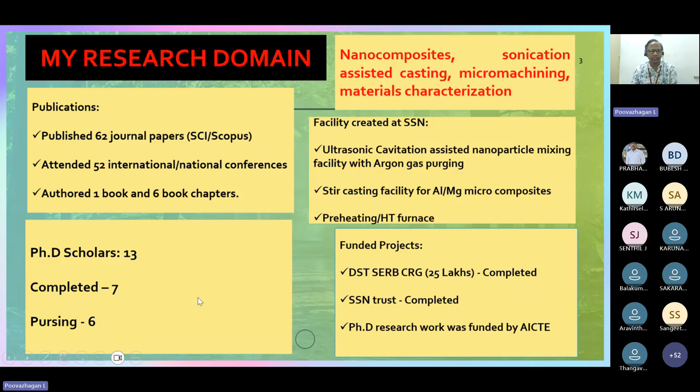This is about SSN, one of the very good green campuses in India. We are the only self-financing affiliated college in the NIRF ranking less than 50. This is about my credentials. As of now, I have guided 7 scholars and 6 scholars are currently pursuing PhD.

So at the end of this lecture, we will try to understand what are all the selection criteria we are going to use to select the lightweight material for additive manufacturing processing. So my focus will be mainly on the lightweight structural material, what are all the selection criteria, and what are all the widely acceptable additive manufacturing technologies that can be used for lightweight structural material manufacturing, layer by layer.

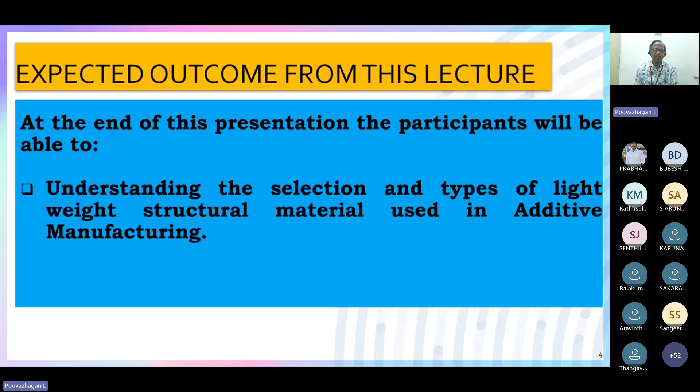This is the content in which I am going to present. The first one is the introduction of lightweight structural material, what are we doing with the material, and what are all the methods available for selecting lightweight structural material, and what is the role of additive manufacturing in the fabrication of lightweight structural material.

And what are all the most important additive manufacturing technologies we can use for manufacturing lightweight structures, so that we can able to decide which particular additive manufacturing technology shall be used to manufacture any one particular lightweight structural material.

Also, at the end, we will have some quiz session so that we can have some recap.

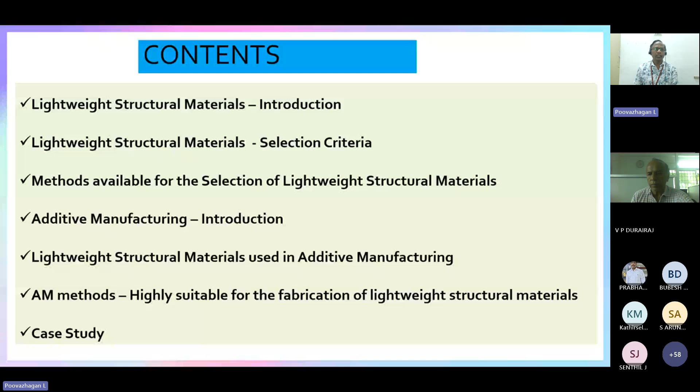These materials are widely used in structures. The well-known structural application is, for example, commercial buildings or residential buildings or educational buildings, where we are using RCC, reinforced cement concrete, as a structural material. So widely we are using it in applications of beams, columns, and also in automobile chassis we are using, for example, aluminum panels, also bicycle frame. All these are some examples of structural material.

So I am not in this case talking about... these are some of the materials that can be used in structural applications.

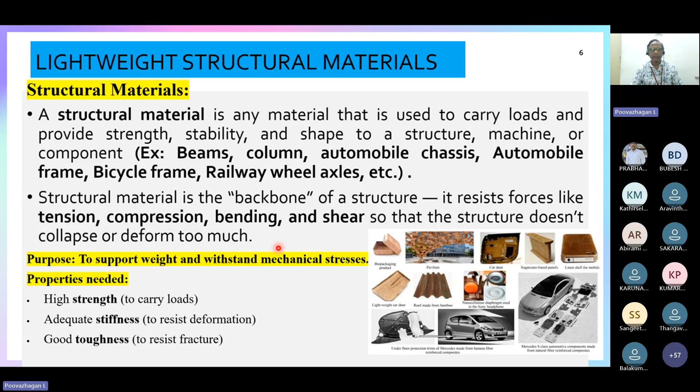So the ultimate aim of any structural material is to withstand the tensile, compressive, shear, and bending type of loads. Whenever we are looking at lightweight material, that type of material naturally will be having density lesser than 5 grams per centimeter cube.

So the property we look for in the structural material is specific strength and specific stiffness. That is, for the given weight, how much load the material can withstand - that is known as specific strength. Similarly, for the given weight, how much stiffness the material has - that is known as specific stiffness.

So whenever any material has high specific strength and high specific stiffness, that material is known as lightweight structural material. These materials are generally used to withstand all types of loads - not only tensile, compressive, shear or bending, but in real time any type of loading condition, suddenly applied impact load, any type of loading condition. So naturally this lightweight structural material tends to have resistance against these.

So whenever we use lightweight material in any application, ultimately we are going to reduce the weight of the system. Whenever the weight of, for example, an aircraft reduces, we save a huge amount of cost in fuel consumption. Similarly, the energy savings are also huge. Ultimately we are moving towards sustainability, which is the core principle nowadays all developed countries are moving towards.

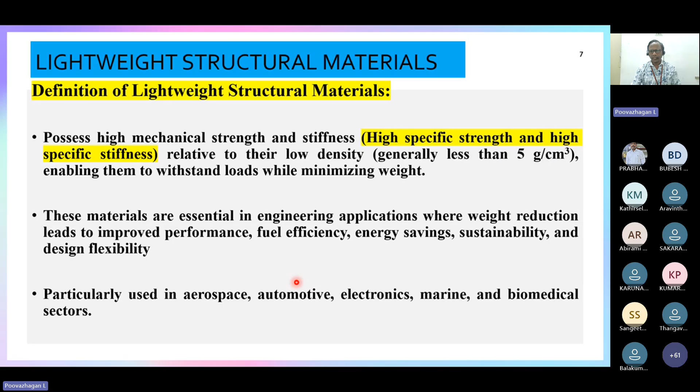So whenever we talk about sustainability, it leads to a simple lifestyle of saving energy or reducing the carbon footprint. So all structural materials in the lightweight category are widely recommended in aerospace application, automotive, electronics, marine, and even in medical applications, but most applications are in aerospace and automotive. In aerospace you can find titanium, aluminum, magnesium. Nowadays n number of composite materials are used in the lightweight category, and similarly in automobiles also we find n number of lightweight structural materials.

This slide gives an idea about widely acceptable structural materials. Steel is widely used as a structural material, but the problem with steel is its density, which is huge, around 8 grams per centimeter cube. However, its toughness is very good. Out of the available materials in this category, steel has the highest possible toughness.

Coming to aluminum alloy, it is an alternative to steel in most aircraft and automobile industries. Its density is around 3 grams per centimeter cube, so almost one-third of the weight is saved when using aluminum as a replacement for steel. But the fracture toughness value, maximum around 35, is also about one-fourth of steel.

So we need to compromise, and also consider the cost factor. If we take steel, the cost is somehow less, but when considering aluminum, titanium, or magnesium alloy, the cost is huge. Correspondingly, we save weight, and when we save weight, fuel consumption is less. When fuel consumption is less, the carbon footprint is also less. In the end, we move towards sustainability, which is the core principle of lightweight material.

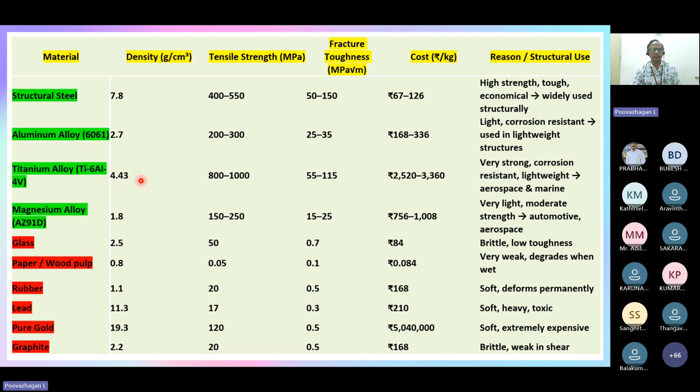So if you are considering lightweight structural materials, aluminum alloys and titanium alloys are widely acceptable in the metal or alloy category. If you are considering composite material, then carbon fiber reinforced composite or glass fiber reinforced composite are widely acceptable lightweight structural materials.

Next to composite, you can find aluminum around 20%, and titanium and its alloy around 15%. Then steel - we are still using steel at 10%. Other materials like magnesium are around 5%.

The major issue whenever we go to steel is, for example, each 1 weight percentage reduction in aircraft weight leads to almost 0.75% decrease in fuel consumption. So if you reduce the weight of the aircraft by 14.5 kg in a net, that leads to around US dollar 1.2 million in annual fuel savings.

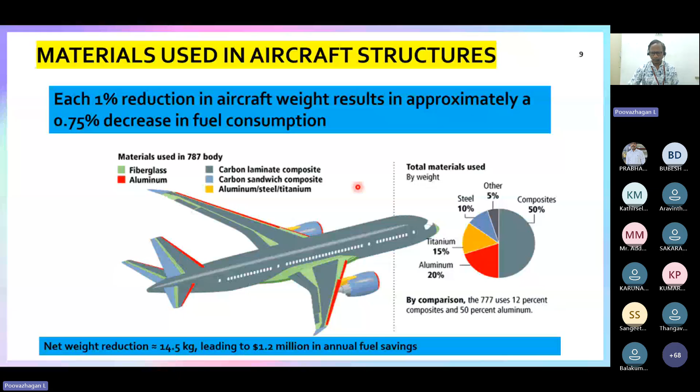So if you want sustainability, one way is to move towards lightweight material. This FDP is more relative to lightweight structural material that can be used in additive manufacturing applications. These are some examples of structural material in which naturally we use steel or cast iron.

Whenever we replace steel or cast iron with a lightweight material category like aluminum, you can save a huge amount of weight, and naturally a huge amount of cost cutting in fuel consumption. For example, the engine block naturally used steel, but nowadays it has been replaced with aluminum alloy.

Similarly, in the automobile wheel - this case study I will discuss in depth at the end of this lecture - we also use steel, but it is heavier. The only advantage is it is cheaper compared to aluminum or magnesium alloys.

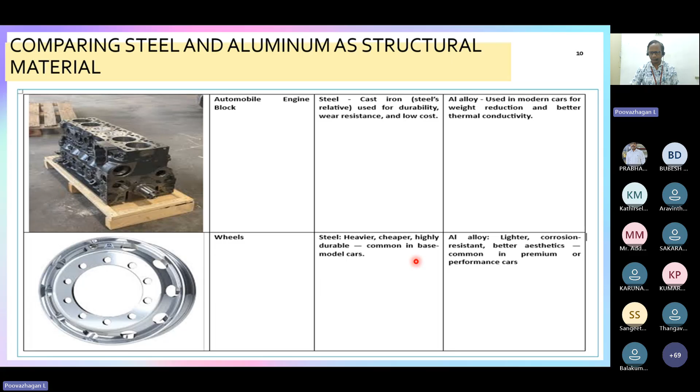Similarly, for the automobile body chassis and body panels, previously and even nowadays we use steel, but this steel is now being replaced with aluminum alloys. So several aluminum alloys are now available to replace steel.

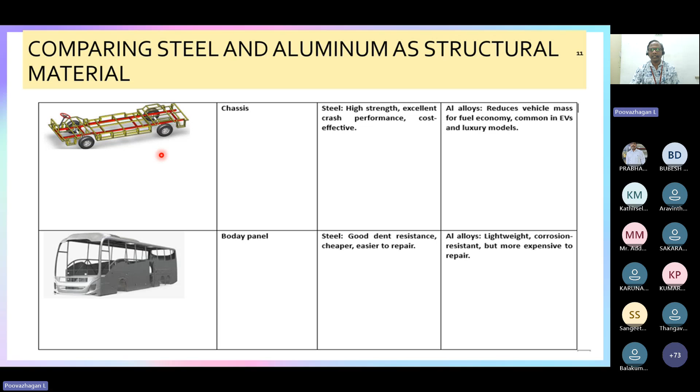The widely acceptable aluminum alloys are 6061, 6063, 5083, 5089, 5053, then 7075. All these aluminum alloys are slowly replacing steel in the automobile or aircraft industry. The ultimate aim is to replace the denser material with lightweight material.

Coming to the selection criteria, whenever we talk about lightweight structural material, we need to consider important properties. If we consider mechanical properties, the foremost is toughness. Remember this term - toughness plays the major role in selecting any material for any engineering application. When I say a material has good toughness, that indicates it has very good strength, and at the same time good ductility.

That is, if you take the stress strain diagram, it has very good x-axis, that is ductility, and also very good y-axis, that is strength. So the material which has good strength and ductility is naturally going to have very good toughness property.

Then stiffness, that is resistance against deformation. Any material which has good elongation and good Young's modulus will have good stiffness. Actually, stiffness is measured by measuring the Young's modulus of the material.

Then fatigue strength - fatigue strength relates to repeated type of loading. Whenever any material is subjected to repeated loading, that material will be experiencing fatigue. So all these mechanical properties are very much important whenever you are selecting the lightweight material for structural application.

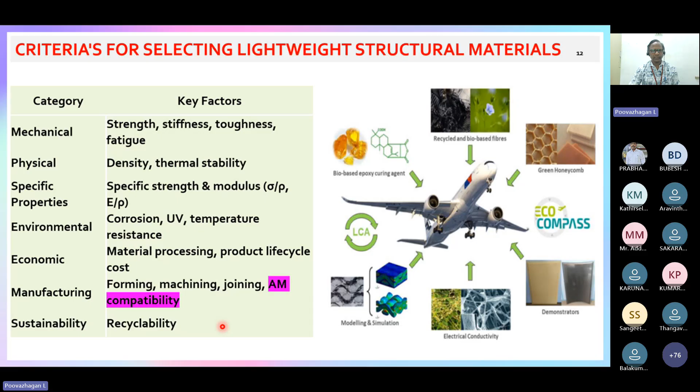So whenever we talk about sustainability, whatever material we choose in the lightweight category should be recyclable. Whenever it is not recyclable, that is not a sustainable material - that is the ultimate aim of sustainability.

So what are the methods available to select the lightweight material? The well-known method is the Ashby chart. You might be very much familiar with this - you have a ready-made chart.

This particular chart gives the idea of the relation between two important properties, like strength and density (that is weight), stiffness (that is Young's modulus) and density, then stiffness and cost. By using the Ashby chart, you can select the material with respect to specific strength and specific stiffness.

Another well-known method is WPI method, weighted property index. For these two methods, I will give the demonstration how these two methods can be used to select the lightweight material for structural applications. Apart from these two well-known methods, nowadays ready-made softwares are available.

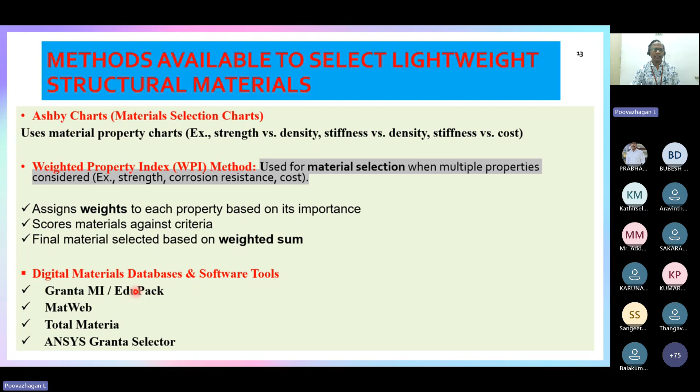We can directly use this online software to select the material for the lightweight application. Also, the well-known multi-criteria decision-making methods can also be used to select the material for lightweight structural application, like TOPSIS or fuzzy Promethee, even desirability analysis. All these methods can be used to select the particular material for structural application.

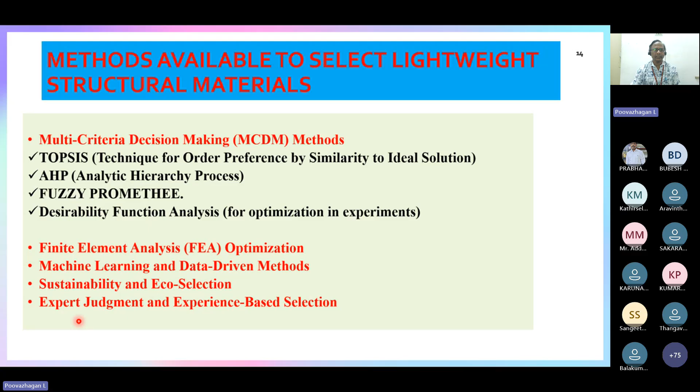Apart from this, we can also use now machine learning technology, also the expert judgment. Anyone who is having very good knowledge in the material selection, you can give the particular material for the selection of lightweight structural. So coming to the material selection category, the well-known chart is known as Ashby chart.

Then ceramics also having very good low density, but the tensile strength of the ceramics is also not as much as comparable to the metal or alloy. Then coming to the metal or alloy, widely acceptable structural material in automobile, aircraft, marine and electronics industry. So most of the structural materials are metal or alloy based, like steel, aluminum alloys, titanium alloys and magnesium alloys.

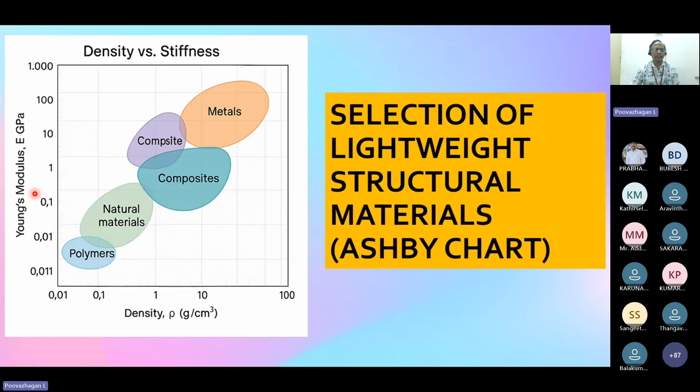You can select the density of the material and the toughness you require, or the stiffness or strength you require. For example, if you want 2.5 or 3 grams per centimeter cube with around 100 megapascal strength, accordingly you have to select the material in this category. Mostly that will be magnesium or aluminum based alloys.

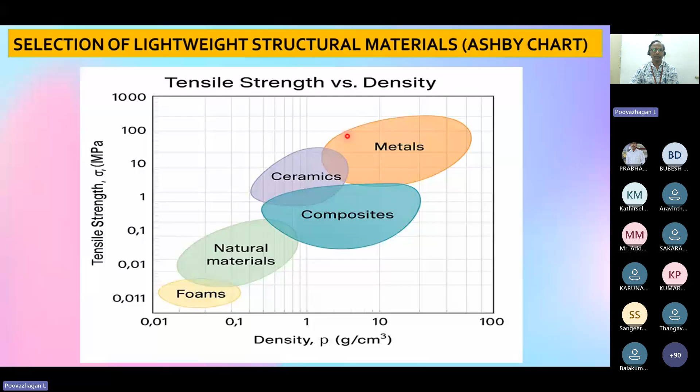So this Ashby chart will give a direct idea to select the material based on the weight or density relation with the various properties of the material, like tensile strength or Young's modulus, that is stiffness.

Method to select the material for lightweight application: WPI. This is a very interesting method where if you are going to have n number of properties, for example corrosion resistance, cost, fatigue strength, creep resistance, or wear resistance, then you can use this WPI method where you need to list them.

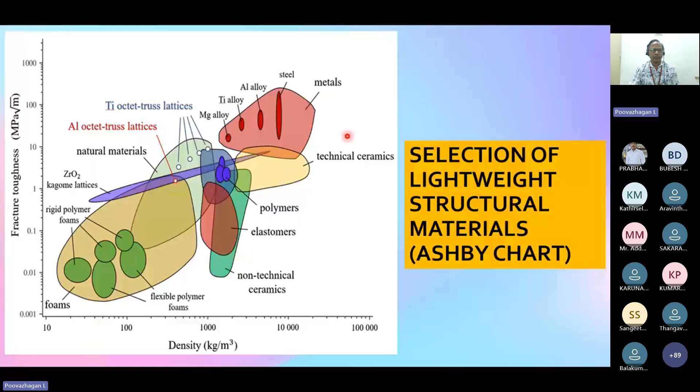For example, I have chosen lightweight automobile wheels. Generally steel is widely used in automobile wheels, but nowadays we talk about alloy wheels. In the alloy wheel category, generally aluminum alloys are used. Still, if you want to reduce weight, you can use magnesium alloys. Naturally, whenever we replace steel with aluminum, cost will increase. If we replace aluminum with magnesium, again cost will increase. But we can save weight.

Whenever we are able to save weight, we can save fuel consumption cost, so we can move towards a sustainable lifestyle. That is the ultimate aim of any lightweight material application. This WPI method is widely used whenever we have multiple properties to consider.

So whichever property is most significant for that particular application, we need to assign the weight. For automobile wheels, for example, if tensile strength is most significant, you assign more weight to it, then density, then corrosion resistance, then wear resistance, then cost. Like this, we give weightage to each property for the particular application. For example, 5 is extremely significant, 3 is moderately important, and 1 is less important.

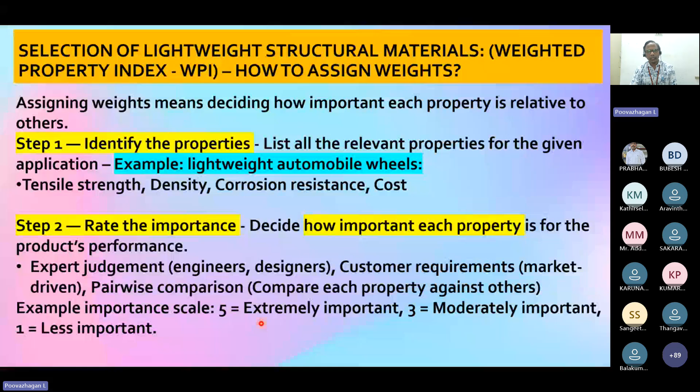All these weightages are for the material and its properties. For example, if you are choosing aluminum alloy for the automobile wheel, the most important property should be tensile strength, fatigue strength, or corrosion resistance. So we need to assign weight to that. Depending on this weightage, we need to give the rating.

For the automobile wheel, tensile strength is most important, so we give 5 to this weightage. Then density is next most important because we are considering the specific strength of the material, so density is also very important—we need a material with less density. For that we assign a weight of 4.

Corrosion resistance: naturally the automobile wheel, whenever it is moving over road conditions, is subjected to a huge amount of wear and tear. Estimating cost for any manufacturing industry is an economical action—we need to reduce the cost of manufacturing. So for cost we give a weightage of 1.

We are considering only these four properties. I have not taken fatigue here. Fatigue is also very important for the automobile wheel, as the wheel is continuously rotating and subjected to repeated cyclic loading, but that property I have not considered here. We are considering only these four properties.

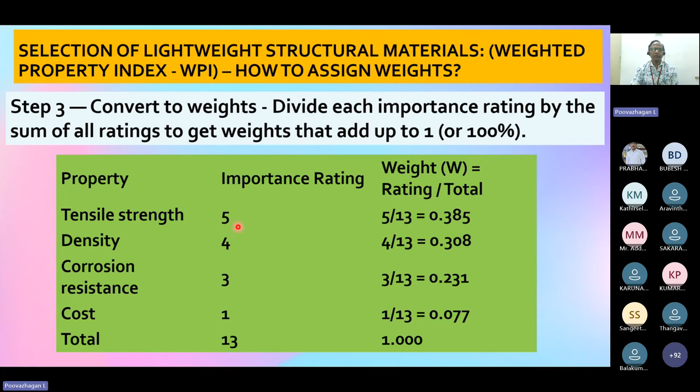The total rating is around 13. So we need to get the importance percentage for each property. For example, tensile strength 5 divided by 13 is around 38.5 percent. Density 4 divided by 13 is around 30.8 percent. Adding all these percentages leads to 100. So by using this WPI method, we can find that tensile strength is the most important property for automobile wheel applications, and next to tensile strength, density plays the major role.

So when considering the various methods available for selecting lightweight structural application material, the Ashby chart is very simple and easily available—online sources are also available. You can directly consider the Ashby chart, like density versus tensile strength, density versus stiffness, density versus fatigue strength, or creep strength.

From that you can choose the particular material. Then if you are coming to the WPI method, depending on the weightages provided, what property is most significant, depending on that we need to select the material. So if you are considering these two particular methods, that can be easily available.

Apart from that, nowadays if you don't have any provision of Ashby chart or WPI method, expert judgment can also be used to select the particular material for the given application.

So in the lightweight material category, you can find n number of materials like aluminum alloy, the widely used lightweight material in the aircraft, even in the marine industry as well as automobile applications. The widely used aluminum alloys are 7075 in the aircraft, 6061 in the automobile industry.

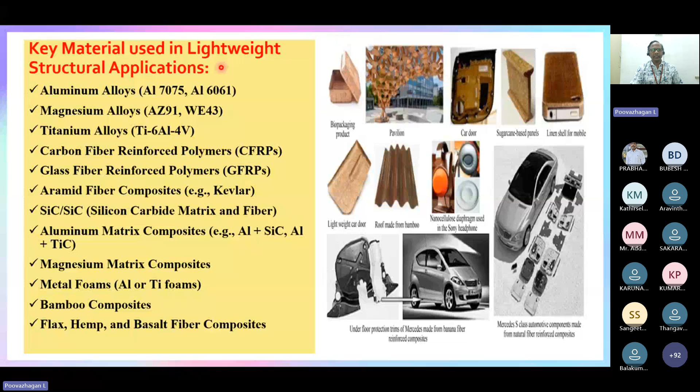So if you are considering all this material, most of the materials are magnesium type material. There is no steel here, even though steel is widely acceptable as a structural material, its density is huge, around 8 grams per centimeter cube. So it is not suitable.

So this particular slide will give the idea of which material is available for the given application. So the well-known material for the structural application has density around 1.7 to 1.8, but the problem with it is having poor fracture toughness and poor ductility.

So when possible, we need to use aluminum alloy as its density is around 2.8 to 3.1 grams per centimeter cube. But for most aircraft applications, we are also using titanium based material as its fracture toughness is very high when compared to magnesium or aluminum alloys. So these are all the materials widely acceptable in lightweight structural applications.

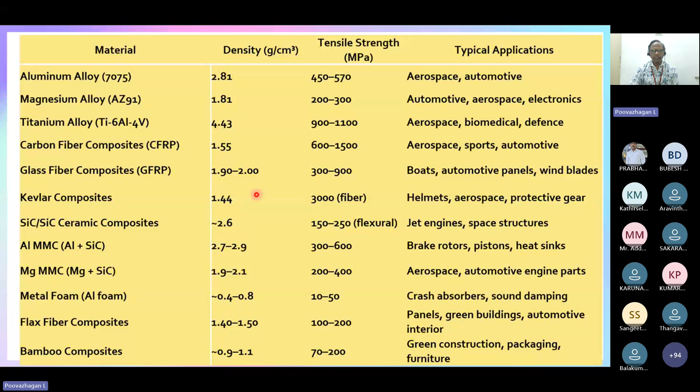So if you are taking the application point of view for lightweight material, you can find n number of applications of this material in the automobile industry, starting with automobile body chassis, body panel, engine components, fuel tanks, even automobile wheels. This case study we will discuss.

So you can find n number of automobile components. They are using various types of lightweight material to reduce the weight, to reduce fuel consumption, to reduce carbon emission, to move towards carbon footprint reduction. That is the ultimate aim of reaching sustainability.

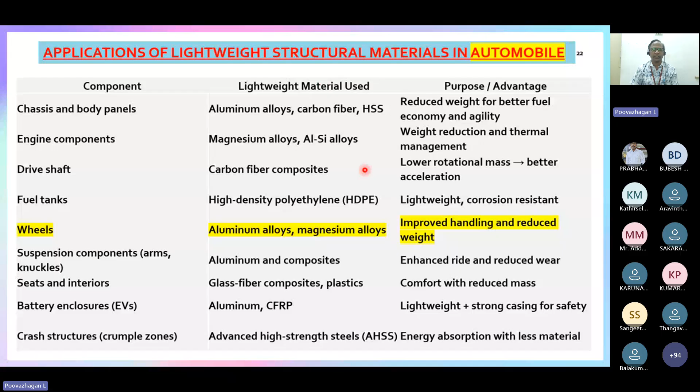Then aircraft is the most significant industry where lightweight structural materials are always recommended. So nowadays you can find n number of carbon fiber reinforced plastics we are using in the aircraft industry. As I mentioned, almost 50% of the Boeing 787 nowadays uses some of the carbon fiber reinforced composite material. So the widely acceptable structural material in the lightweight category in the aircraft industry nowadays is some of the fiber reinforced polymer or plastic material.

Okay, with that small introduction of lightweight structural material and selection criteria, now we are going to understand the additive manufacturing concept. You might be very familiar since in the last six days different professors might have covered the generative design and additive manufacturing concept. So I am not going to teach in depth the additive manufacturing technology, but rather what are all the additive manufacturing technologies that can be used in the fabrication of lightweight structural material.

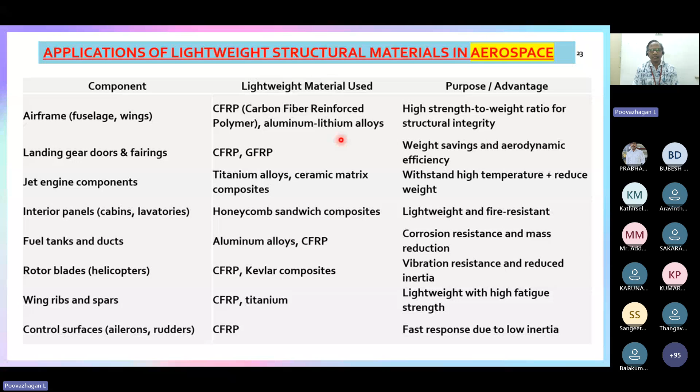Manufacturing used in lightweight structural application, you can find material savings because additive manufacturing leads to less wastage when compared to conventional machining technology. So in conventional machining, the material wastage is huge. Because of that only we are moving towards additive manufacturing.

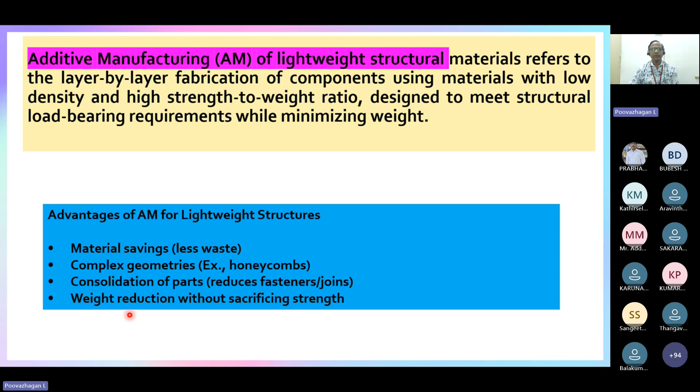Also, as we are using some of the simplest form of CAD program, complex geometry can be made by using additive manufacturing technology with the help of lightweight structural materials. Also, the material weight we can reduce by using different lattice design or different topology design. By using that, we can reduce the weight of the material in structural applications whenever we are going to use additive manufacturing for fabricating layer by layer addition of structural material.

So the most important property which we are going to consider for the structural application of additive manufacturing is density.

That is the most important property - the strength to weight ratio, known as specific strength. The material with high specific strength is naturally chosen for lightweight structural applications. Specific strength indicates, for a given weight, which material performs better. For example, if you take 1 kg of steel, 1 kg of aluminum alloy 7075, 1 kg of carbon fiber reinforced plastic, or 1 kg of magnesium alloy, for that given 1 kg weight, which material performs better? That is where the application of lightweight material is moving. That particular property is known as specific strength or strength to weight ratio.

Also, we need to have good stiffness, that is Young's modulus. As already mentioned, we need good toughness - the material should have high ductility and high tensile strength. Apart from this, for structural applications we need good corrosion resistance. Also, some structural components are subjected to repeated cyclic loading, like automobile wheels, so that type of component should have high fatigue resistance.

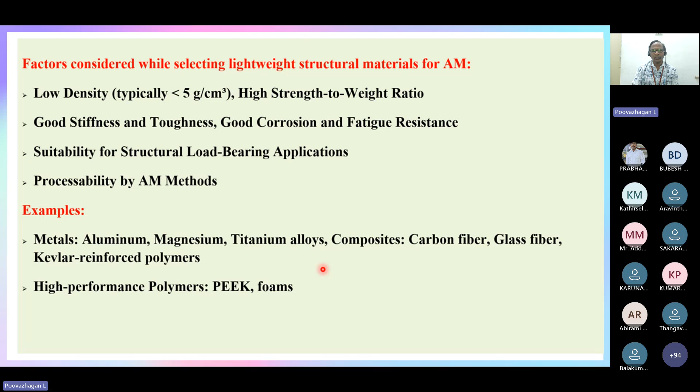So considering all this, the well-known structural materials that can be manufactured using additive manufacturing, in the metal category, are aluminum and its various alloys, different types of magnesium, and titanium alloys. In composites, carbon fiber reinforced, glass fiber reinforced, and Kevlar or aramid reinforced polymers are widely produced using additive manufacturing technology. Also, high performance polymers like PEEK, PEAK, and foams are nowadays also fabricated by additive manufacturing technology.

So the first step whenever manufacturing any lightweight material using additive manufacturing is to fix the properties required for the particular application - whether strength is more important, stiffness is more important, toughness is more important, corrosion resistance is more important, wear and tear resistance is more important, or fatigue or creep resistance is more important. That is known as the functional requirement. So whenever selecting any material to be fabricated by additive manufacturing, first we need to consider the application point of view and what are the important properties required.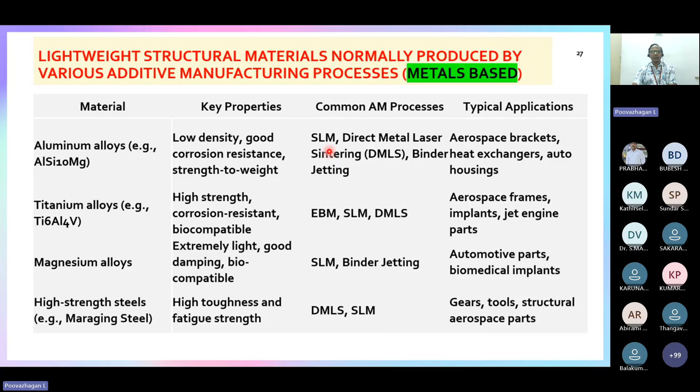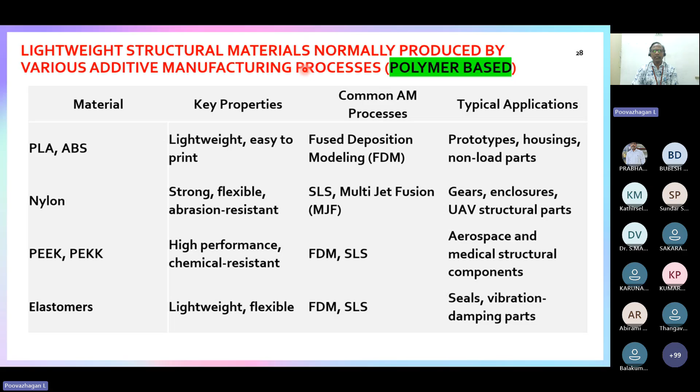If you are using polymers for lightweight matter, again these are all the additive manufacturing methods you can use. The widely used method is FDM if it is polymer. Also we can use selective laser sintering or multi-jet fusion for nylon fabrication by using additive manufacturing technology. If you are going with high performance polymer like PEEK, polyether ether ketone, then FDM and SLS is widely recommended. If you are moving towards natural material that is elastomer, you can use again FDM, SLS. So this particular slide will give the idea how to choose the additive manufacturing method for the particular lightweight material that is based on polymeric matrix component.

Then nowadays we are widely talking about composite because of the lightweight category. In composite material, there will be a matrix and there will be a reinforcement. That reinforcement we are going to embed into composite material by using additive manufacturing.

Composite manufacturing, additive manufacturing technology - for example, continuous fiber FDM or fiber filament, that is FDM technology, if you want to manufacture Kevlar reinforced polymeric material. So these particular 3 slides will give the idea to select the particular additive manufacturing technology for manufacturing lightweight structural material, either by using metal or polymer or composite material.

Remember, the ceramic material cannot be used in structural applications as it is very, very brittle. Even some of the composite materials are brittle.

So the one interesting case study, this will be the last point in my lecture. In this case study, I have chosen the automobile wheel, for example, car wheel. For the automobile wheel, what are all the materials available and how we can use the Ashby chart, how we can use the WPI method to select the particular material depending on properties required for the automobile wheel application.

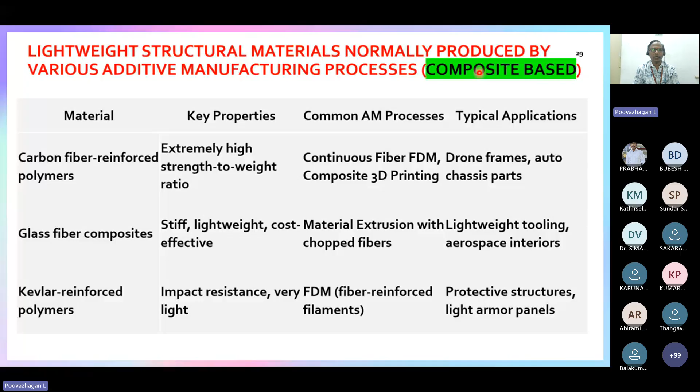So the ultimate aim of this case study is we need to manufacture the lightweight alloy wheels by using additive manufacturing technology. That is the core point of this lecture.

So remember, in the lightweight category, if it is metal or alloy base, we can use magnesium, aluminum alloys, titanium alloys. You cannot use steel, gold, or copper base alloys as their density is more than 8 grams per centimeter cube. So they do not belong to the lightweight structural application materials.

So naturally, on the metal or alloy category, titanium base, aluminum base and magnesium base. Then if you are coming to polymeric base, you can have carbon fiber reinforced polymeric material. You cannot move towards ceramic base material as it is very brittle, that cannot be used in the automobile wheel application as it can easily break during real-time applications.

So the first aim is to reduce the weight. That is the concept of lightweight structural application, to improve the fuel economy. Whenever fuel consumption is less, then cost cutting we are going to have. Apart from cost cutting, carbon emission will be less, so we are going to have less carbon footprint, that is CO2 emission. Whenever CO2 emission is less, carbon footprint is less, then we are going to satisfy various norms, now available for automobile fuel consumption or automobile emission. Then we are moving towards the sustainable concept.

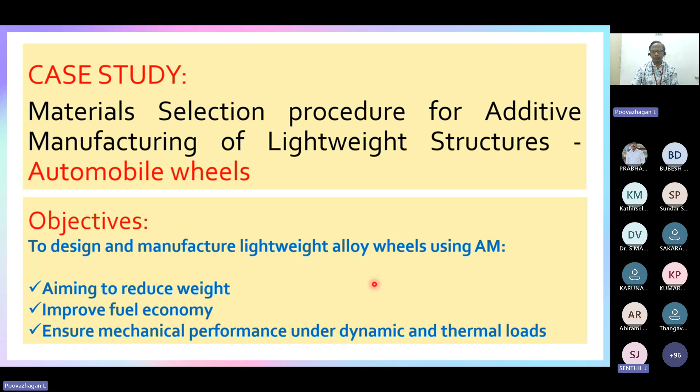So based on that, we need to consider the following points for the automobile wheel application. The first, we are moving...

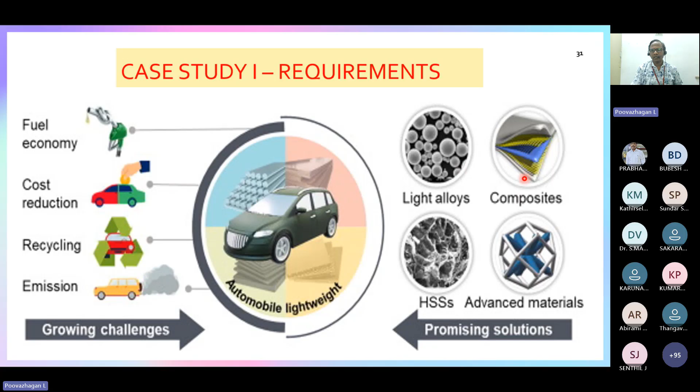Composite, it may be carbon fiber reinforced or glass fiber reinforced. Then high strength steel, this cannot be recommended as it is having huge weight. Then some of the advanced material, if you are going to choose, cost will be the issue. So to compromise all this, we need to select any two materials from lightweight alloys or composite material.

So coming to the application point of view, that is automobile wheel. We all know there are two types of wheel in the automobile. One is the conventional steel base, another one is alloy wheel. So naturally, whenever we choose the alloy wheel, cost will be higher. So if you are considering only cost factor, we need to select steel. But if you are considering the aesthetic look, fuel savings, then we need to select alloy base wheel.

In the alloy base, mostly we are using aluminum alloys, because if you are using magnesium based alloy, the corrosion resistance will be very, very poor, as automobile wheels always generally have application in the open atmosphere. So for the automobile wheels, for the functional, that is property requirement, we need to have high strength in dynamic and static loading conditions. Another important property is we need to have high fatigue resistance, that is repeated cyclic loading condition. Whenever the automobile wheel is rotating or revolving on the road, it is subjected to repeated type of cyclic loading.

So we need to have the high fatigue strength for that particular material. Also for the lightweight category, we need to have low density. Also for automobile wheels, we need to have very good corrosion resistant property.

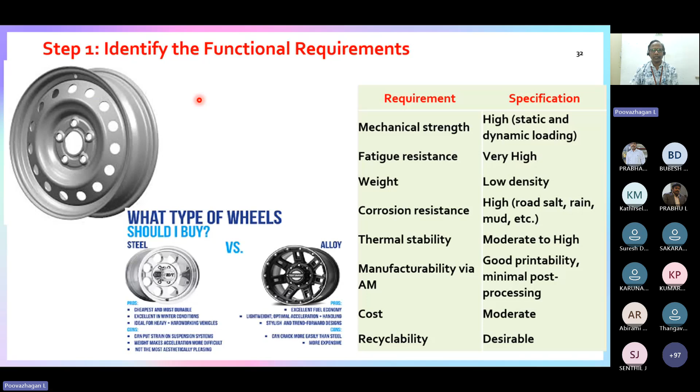For automobile wheel application that can be manufactured using additive manufacturing, considering that point also, we are going to select only two materials: aluminum silicon alloy and scandium reinforced aluminum alloy. These two alloys are very good in all these properties, and they are compatible with different types of additive manufacturing technology.

Also, they are having very good strength to weight ratio, that is specific strength. They are having very good fatigue resistance. Another important property required for additive manufacturing is printing quality. So these two materials specifically, aluminum silicon magnesium alloy and scandium aluminum alloy, are easily additively manufactured.

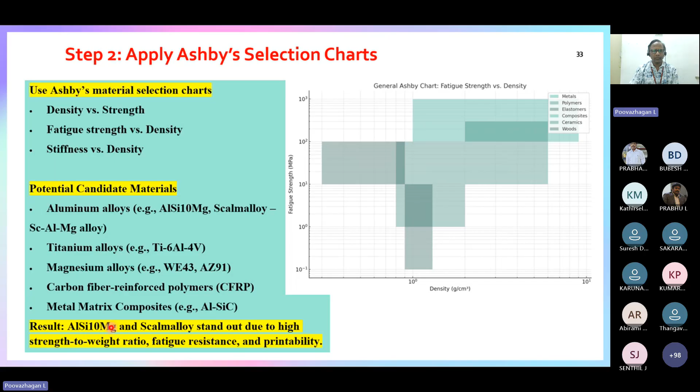Once you have selected these two aluminum alloys, aluminum silicon alloy and scandium aluminum alloy, we need to select the particular additive manufacturing method. For aluminum alloy, the widely used additive manufacturing methods are DMLS or SLM. These two methods are widely used for various aluminum alloys. For titanium alloys, the EBM method is chosen.

Wire arc additive manufacturing cannot be chosen for this particular application as it has poor surface finishing quality. So DMLS and SLM are widely used to fabricate lightweight structural aluminum alloys based on aluminum silicon magnesium or scandium based aluminum alloys. These two aluminum alloys can be easily manufactured using these two additive manufacturing technologies.

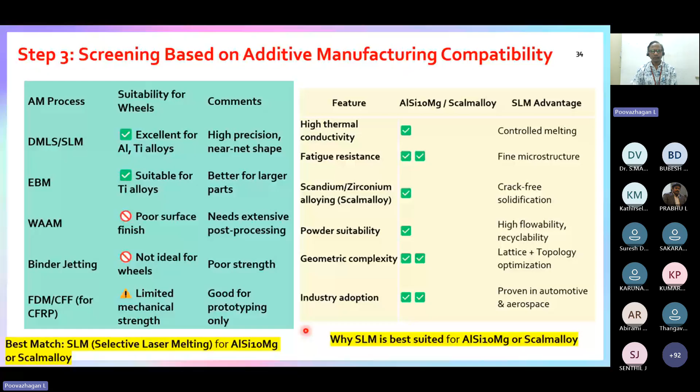These two aluminum alloys can be manufactured by using DMLS and SLM additive manufacturing technology. This is how we need to select the material for a particular application. Starting with the functional requirement, list the materials available by using the Ashby chart, and considering the additive manufacturing compatibility, select the suitable or most suitable material for the particular application.

Then coming to the WPI method, this is the most important step. For example, for the automobile wheel application, you can have aluminum silicon alloy, scandium aluminum alloy, or titanium base alloys. Out of these three materials, we need to select the one that can be manufactured by using additive manufacturing technology. For example, we need to assign weight.

The introduction I have already given. If we are considering the automobile wheel application, the most important property is strength, for that we are assigning 25% weight. As it is subjected to repeated loading, we are assigning 20% weight to fatigue resistance. Like this, we assign weight for all the factors. Even additive manufacturing printability characteristics are very important.

If you add all this weight percentage, it leads to 100. Now we have chosen three materials, or we are being provided with three materials. Aluminum silicon alloy - for that we need to assign weight. For strength, this is 7. But scandium aluminum alloy has a very good strength to weight ratio. If considering the overall weight assigned to all three materials and adding them, for aluminum silicon alloy, for example, 7 multiplied by 10 is 70. So 70, 60, 80, 90, 80, 90 - adding all this gives 770.

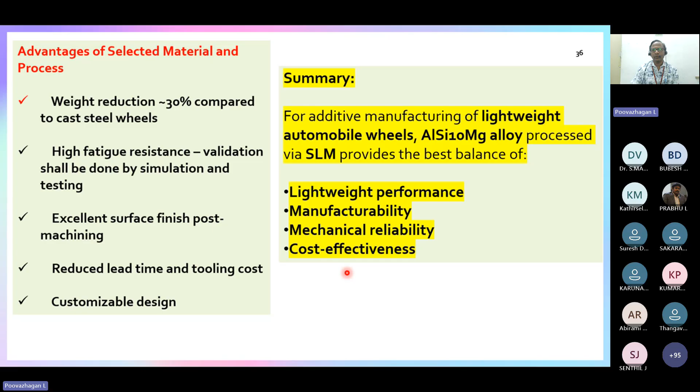On the whole, if we consider these two aluminum alloys for the automobile wheel application, even though scandium aluminum alloy has very good strength, it cannot be directly chosen because it is not economically feasible to choose scandium base aluminum alloy over aluminum silicon alloy. On the cost factor, we need to select aluminum alloy because we need bulk volume for automobile wheel applications. Also, the best available additive manufacturing technology is the SLM method for manufacturing aluminum silicon alloy for automobile wheel application.

So with this, my presentation is over.

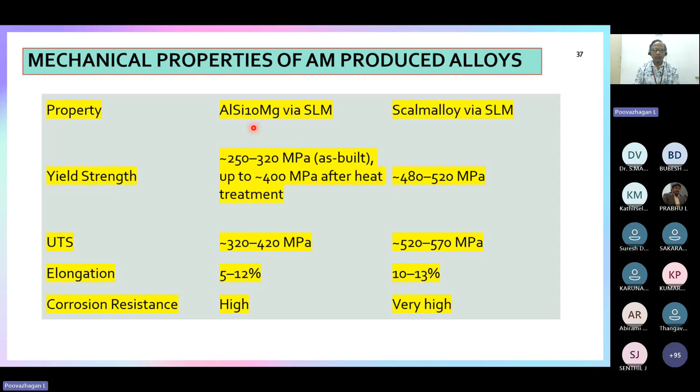So now the participants can answer the quiz questions. I have given a very simple quiz question based on my presentation. After that, we will have the discussion. The first question is: which particular property is most required for the lightweight structural application?

Can anyone unmute yourself and answer these questions. What is the most important property we consider for lightweight structural applications? Density, very good. Because we are talking about lightweight material, strength to weight ratio or stiffness to weight ratio plays the major role.

Second question: for the application of aerospace frames, what property do we mainly choose for lightweight as well as load carrying capability? Strength to weight ratio, sir. Very good, strength to weight ratio. That is where the topic is mainly focused.

Another interesting question: you have been provided with two important materials for automobile wheel application. Material A has some density and tensile strength, Material B has some density and tensile strength. What procedure can we adopt to select one of these materials for the automobile wheel application? How do we select the material from an application point of view?

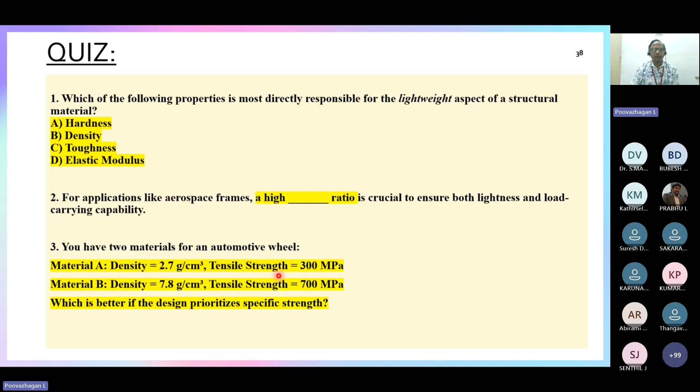Again the same property we consider: strength to weight ratio. You consider the strength, divide by density, and see which gives good strength to weight. Material A. So depending on the calculation, you can select.

Coming to the fourth question: which software tool is directly used for selecting materials from the application point of view? What software do we use for selecting the material?

In one of my slides the answer is available. If you consider the software, AutoCAD is not material selection software, ANSYS is also not material selection, SolidWorks is also not used in material selection. So the answer is B. Then coming to the next question.

In the WPI method, all properties are given equal importance - true or false? Anyone please answer. False, sir, it is false because property matters. That is what the method is explaining - weighted property. Which property is most significant? For that we assign more weightage.

The sixth question: in the WPI method, the weight assigned to the property represents - is it absolute, relative, or depending on manufacturing cost or density which we select? It is relative importance. Whenever we consider multiple properties for a particular application, it is of relative importance. There is no absolute importance for any property for any application - it is of more relative importance to the properties.

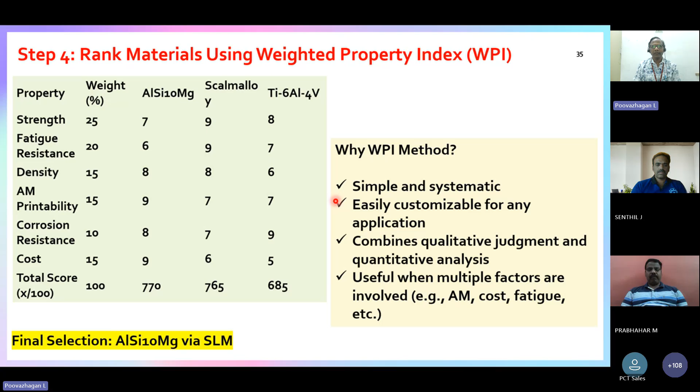The major challenge is always topology optimization, how to use minimum material without affecting the performance for a particular application. I showed the topology design in one slide, you can use more weight or less weight, but we need to optimize which particular topology design or lattice structure, that is 3D printing structure, gives the better idea for the particular application. On the right side, less material is used, on the left side, more material is used, so naturally we go for the right side design. Topology optimization and lattice structure design in 3D printing have a wide range of optimization requirements. If you optimize in these two categories, you can save huge amounts of material and cost, and reduce weight drastically when proper topology and lattice design is followed in additive manufacturing.

Thank you, sir, I think there are no more questions. It was really an exemplary and explorative presentation. You made the complex topic into a step-by-step procedure with a lot of real-time examples and case studies, sir. It really shows your insightfulness and confidence in your subject area. Thanks a lot for your wonderful time and for sharing your expertise, sir.